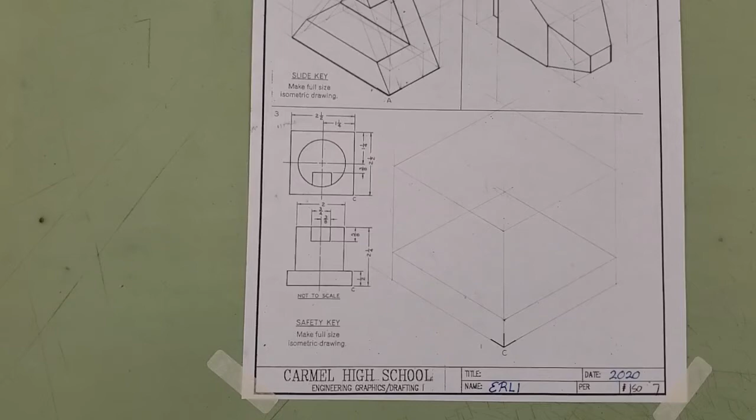So for our last exercise, I went ahead and drew the glass box, the total height, total width, and total depth of our final item.

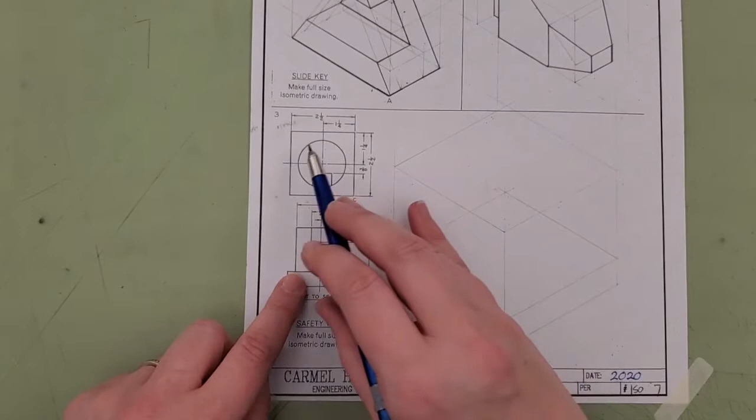The next thing I did was I drew a square up at the 1/2 inch distance to create this platform. In the middle of the platform is a cylinder that goes the entire height, and it's a 2-inch diameter cylinder.

So what I'm going to need to do is find the center of this top part of the glass box. It's okay that the glass box exceeds the perimeter of the drawing space, because the actual drawing itself will stay within that area.

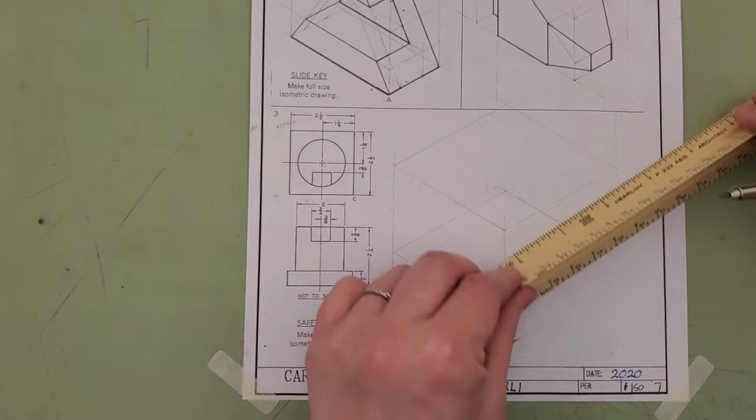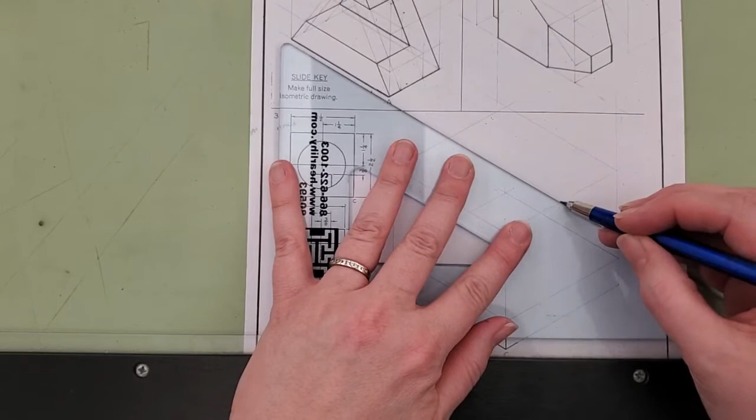So to find the center mark, I'm going to measure in 1.25, because the total width and depth is 2.5. I'm going to transfer that back and forth, but I'm also going to use that to transfer that line down. You'll understand why in just a couple of moments.

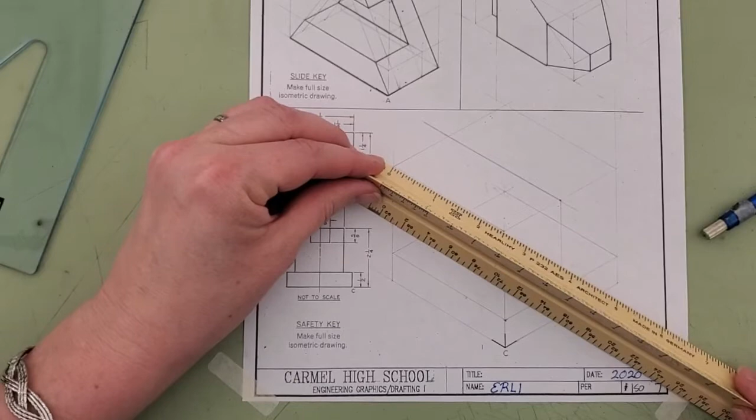That's a little bit dark, so you're going to want to go lighter than that. I'm going to do the same thing on this side as well, 1.25, and transfer it lightly down and over.

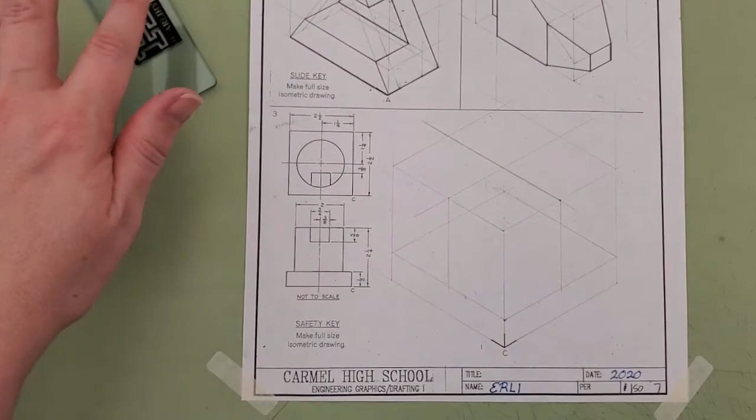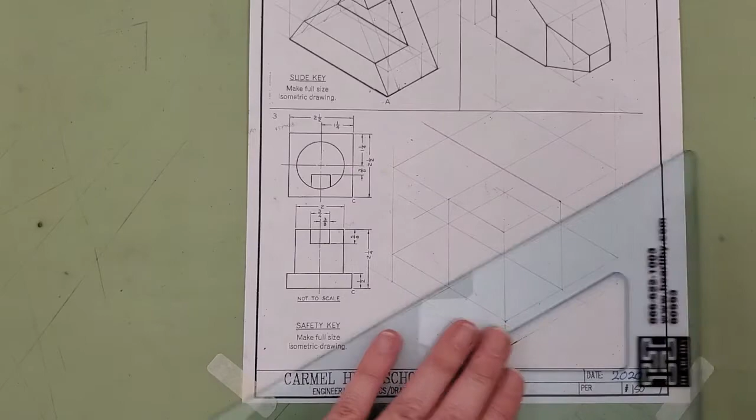I'm also going to be drawing those circles lightly, doing everything in construction weight line first before going back to darken it in, because this cylinder is a little bit odd. It has a tiny little notch cut out of it, so we have to take that into account. You're going to be using your circle template quite a bit on this one.

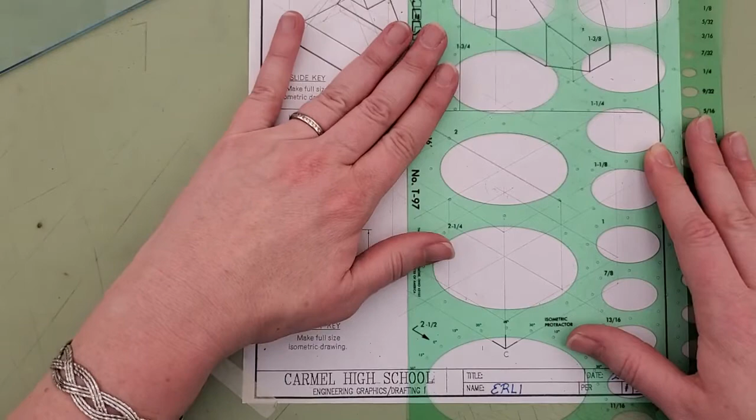So I went from just a box to having a ton of lines. The first thing I'm going to do is line up my circle template on those dots on the center lines we just created, going nice and light with this to begin with.

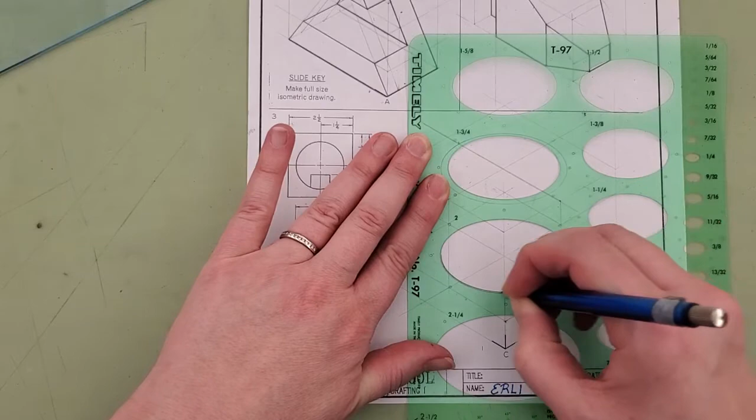Then I'm going to do the same thing down on this platform as well. If you just take a moment or two to line things up at the beginning, it goes a lot better. On the bottommost piece, I'm only going from the widest point down to the widest point, because anything behind that in an isometric view, I wouldn't be able to see—not without some superpower glasses or anything like that.

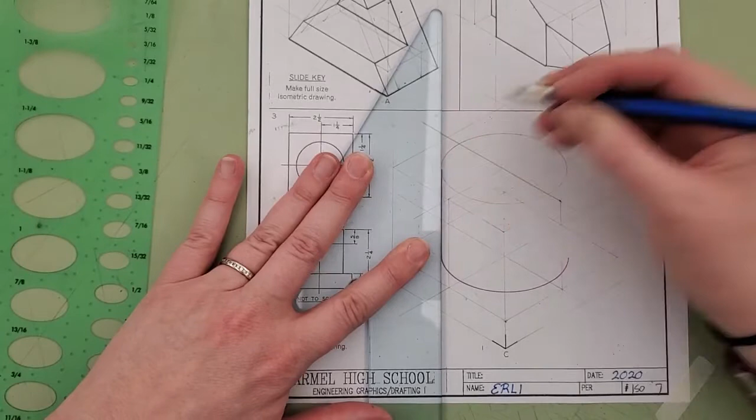And now I can draw in these lines to help guide me to make sure I'm staying nice and square.

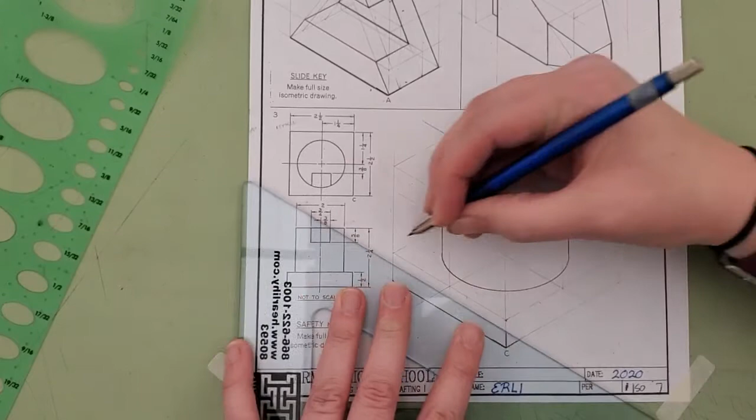So the next thing, we have the beginnings of our cylinder. If it helps you mentally, go ahead and darken in these object lines as well now, because you can see where the edges of your cylinder are and where those object lines are going to be blocked from visibility based on the orientation here.

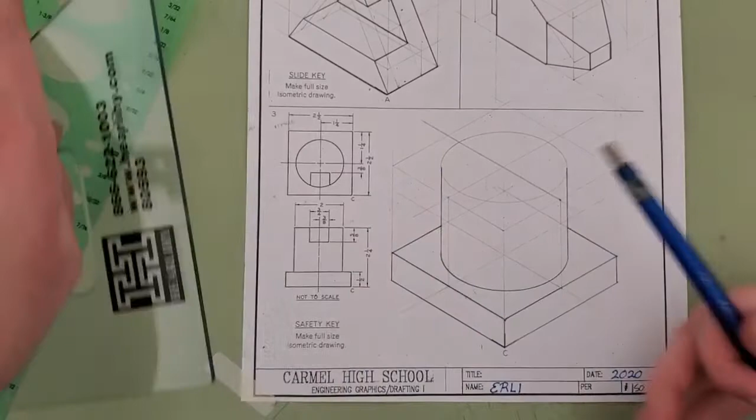So I have the darkened object lines, I have the beginning of my cylinder, but now I've got to get this notch that's cut out. This is going to be our front side, and it looks like the notch is cut out of the front, so we're going to measure forward on this line 3/8 of an inch.

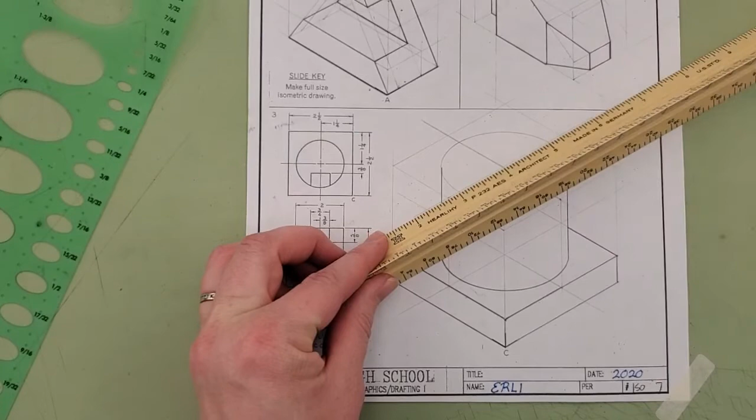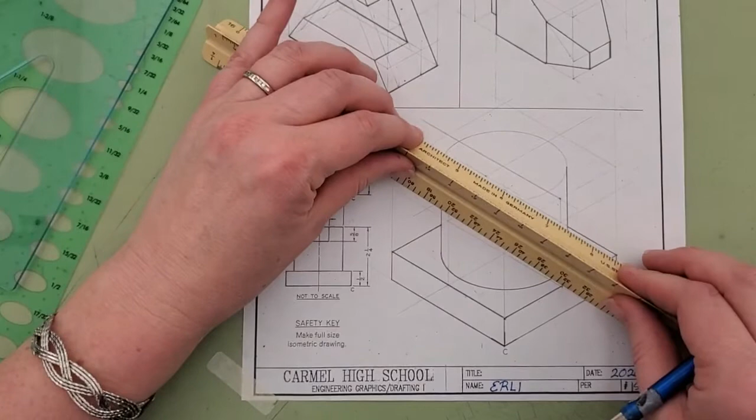We're going to use that and bring that out left and right. The entire width of that notch goes 3/8 inch over in each direction. So there's 3/8 and 3/8.

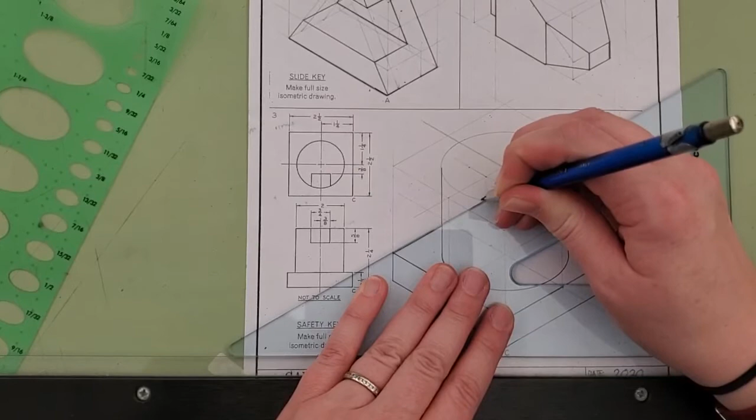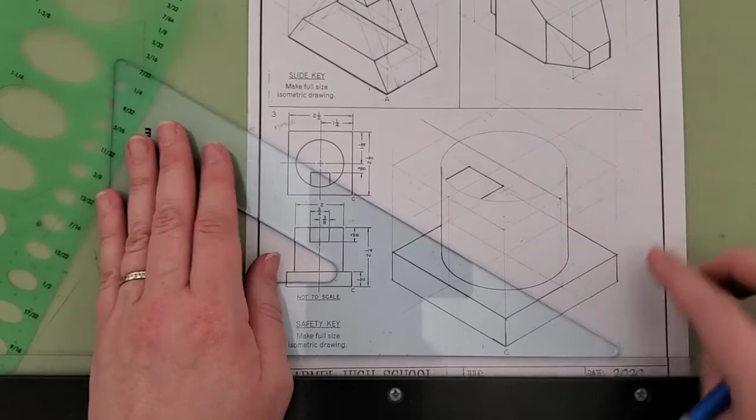So you're seeing that I'm stopping on that curve with my lines. There we go. Now for the top part, I'm ready to darken in my object lines for my circle.

So I'm going to reline that up. There we go. Oops, I wiggled.

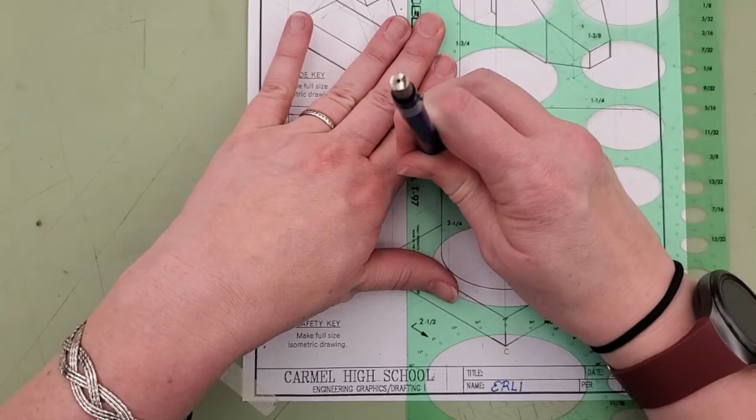See this part where I overshot my mark? I'm going to have to come back with my eraser shield and clean that up a bit.

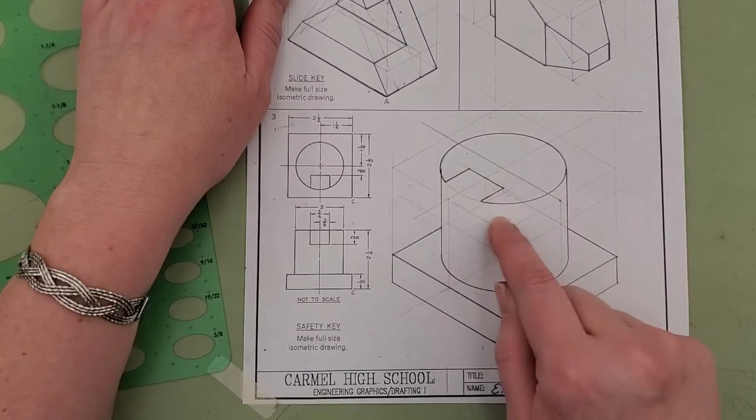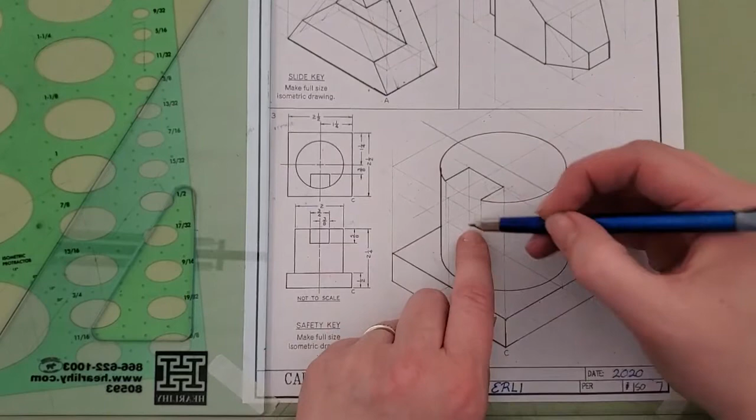So next, the bottom of that groove—we can draw lines that extend down to help us see where that's going to end up being. But the problem is that we need to have this part arced, since it's a circular kind of groove that's cut out as well.

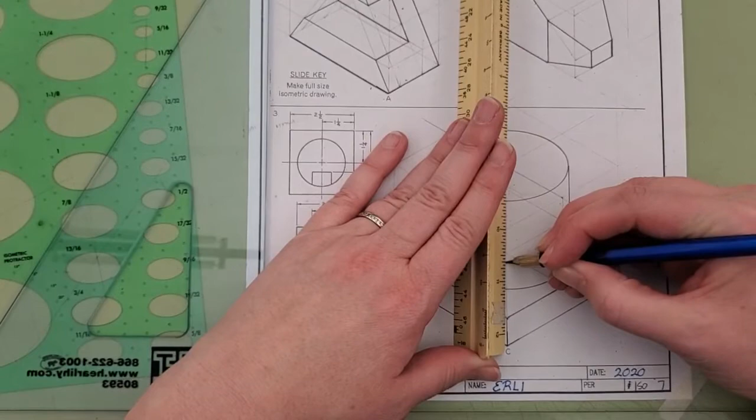So we're going to bring down those construction lines, those center lines, 5/8 of an inch. I'm going to start from my front corner, measure 5/8 of an inch, and project that right and left.

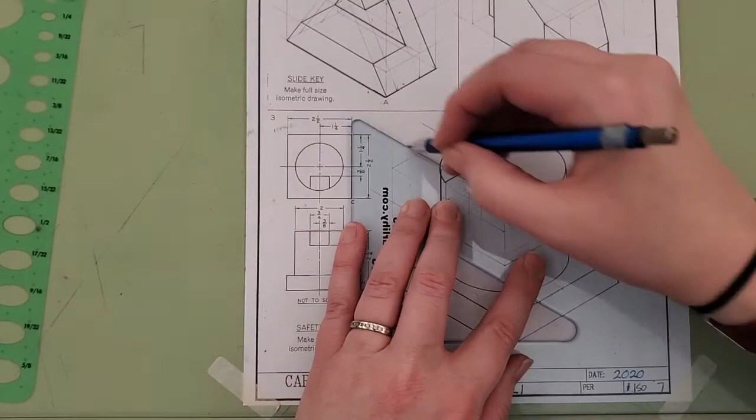Now that line that I brought down from my halfway mark, I already know where I'm supposed to be drawing that center line. But also, there are so many construction lines right here in the middle, it could get really frustrating trying to figure out what's what. So definitely keep an eye on where your lines are that you're trying to use.

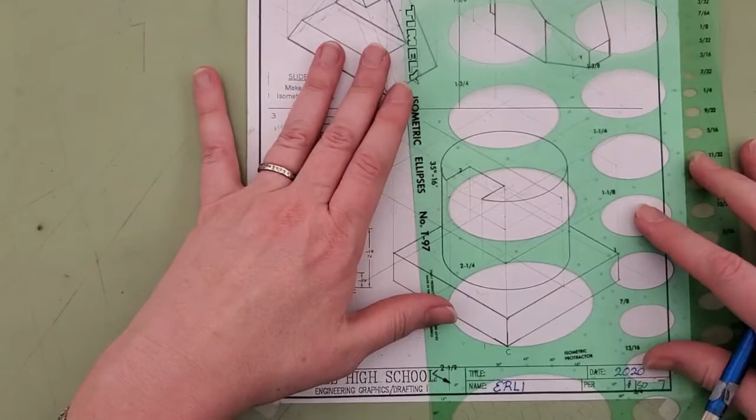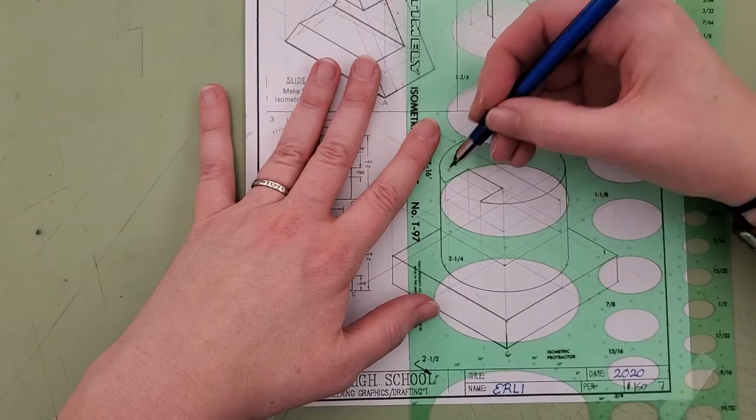So I'm taking a moment, trying to line everything up and trying to remember where each one goes. So this center line—I've got to scooch this down.

I know, this is the hardest part, is keeping an eye on what goes where. And I see that I've already wiggled some, so I'm going to try that again. There we go.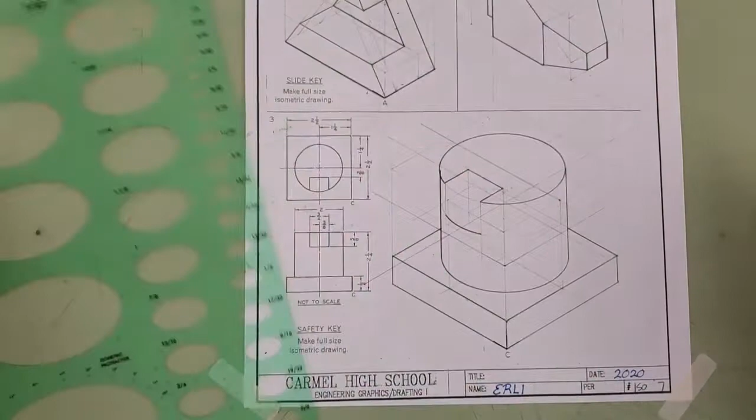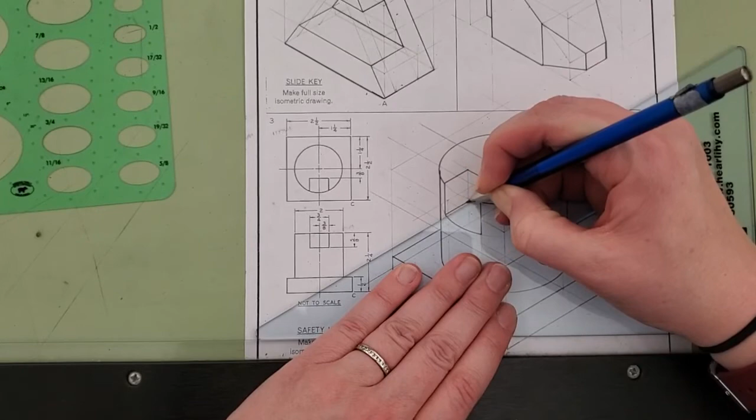And I'm following that arc. So with this one, it's a practice in patience and definitely keeping organized on where your lines belong, finding those intersecting points and keeping track of what goes where.

I'm going to go back and clean that up before I turn it in, but that is how you do the safety key.